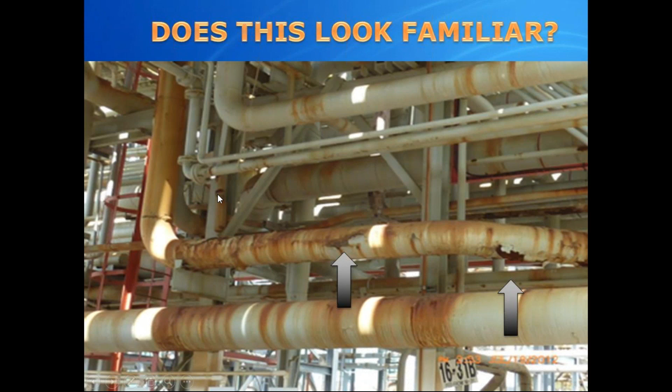I have a few photos to show you. Here's a pipe rack where you can see some major problems taking place. First of all, where the arrows are pointing, you have complete coatings delamination from the 3 o'clock to 9 o'clock positions on the piping itself. You have corrosion at the interface of piping and pipe supports - if you can see my arrow, right around this area here on the pipe supports - and corrosion at edges of angles, like here, and rust stain from overhead corrosion, which is predominantly what you're seeing there, a lot of rust stain.

Here's another example of a pipe rack type situation. This is taken at a bromine plant where salts are a major problem, and you can actually see stalactites of salts coming down. We don't see that a lot in the United States, in most places, but it does happen.

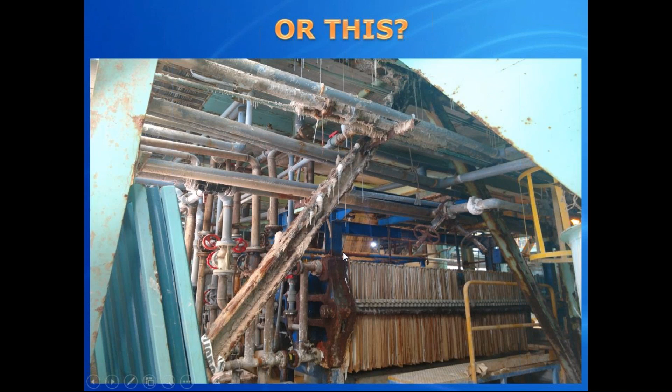Applying coatings over surface salts has drastic effects. Moisture passing through the coating to the substrate, where salts remain, creates a perfect environment for salt-induced corrosion, followed by osmotic blistering, as you're seeing here, and then coating failure.

If you're not coating out right away, you start to see the bottom areas of the pit turning to a dark brown or blackish color. That's actually soluble salts. And if you paint over that, even with a stripe coat or brush-in coat, it's going to fail within about 2 years because you didn't remove the salts at all.

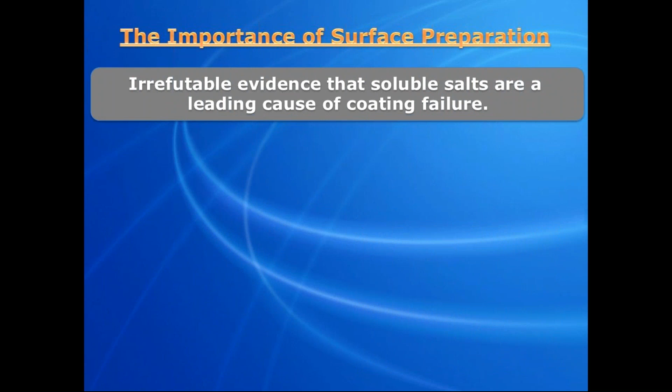There's irrefutable evidence that surface salts, soluble salts, are the leading cause of coating failure, best stated by two renowned authors, Uhlig and Revie, in their excellent reference book, Corrosion and Corrosion Control, as you see in the quote on the slide.

Further to this, Howard Mitschke, then with Shell Global Solutions, conducted an extensive study on the impact of salts on coating performance. He won an award from SSPC in 2002 for his paper entitled Effects of Chloride Contamination on the Performance of Tank and Vessel Linings.

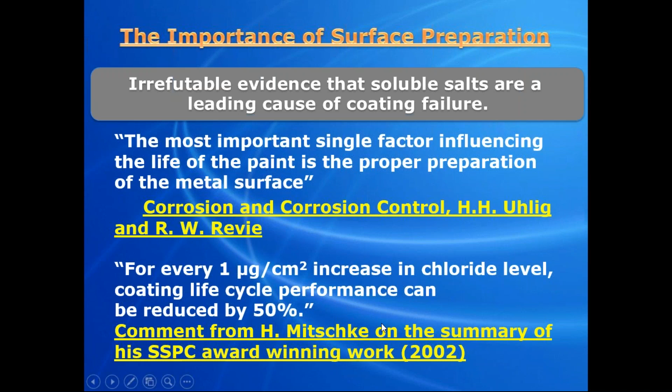He summarized the results of his findings as noted: for every 1 microgram per centimeter squared increase in chloride levels, the coating life cycle performance can be reduced by 50%.

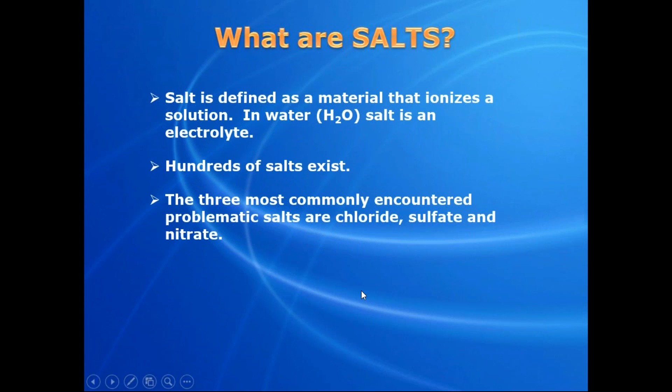Salts are defined as a material that ionizes in solution, and water with salt, H2O salt, is an electrolyte. There are hundreds of salts in existence, but the three most commonly encountered problematic salts, which I'll talk about all day today, are chloride, sulfate, and nitrate. There are others, but they're not nearly as abundant.

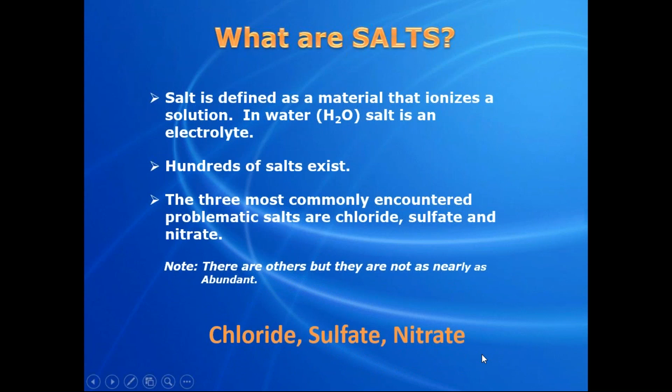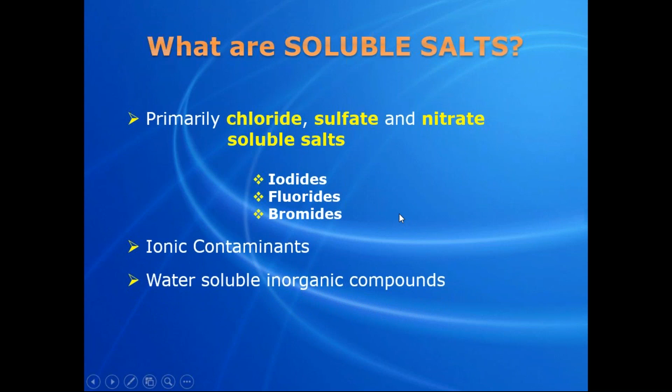Here's an example of some of the other ionic salts we deal with today: iodides, fluorides, and bromides. But all of these salts are ionic contaminants that are water-soluble inorganic compounds, and they are non-visible contaminants.

Why weren't salts a problem when we used lead-based paint?

We all know how harmful red lead paint is when exposed to mankind, and how critical the steps are to encapsulate or remove these red lead coatings today. Myself, after applying thousands of gallons of red lead, mostly in confined spaces, over a time frame of nearly 12 years...

And before OSHA stepped in to protect mankind from these extremely harmful coatings, as OSHA back then was still in its infancy, I had contracted an extreme case of lead poisoning that ultimately damaged my central nervous system. I still suffer from this today.

Nonetheless, red leads were some of the best coatings ever made, but we didn't know until it was too late how it would affect the applicators of this very product.

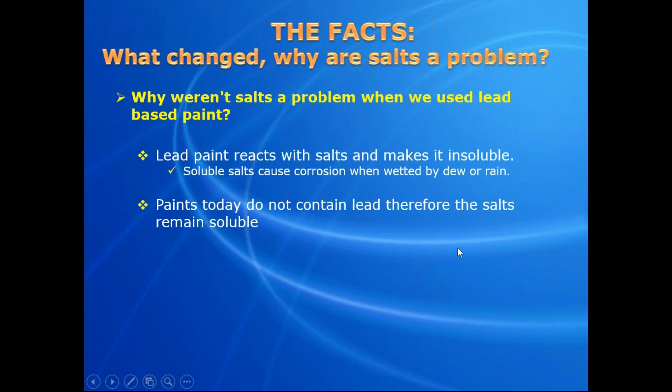Lead paints reacted with soluble salts to make them insoluble, as you see on the screen. Soluble salts without the lead cause corrosion when wetted by dew or rain. Paints today do not contain lead, therefore the salts remain soluble. The transition from lead-based to polymeric-based and thin film coatings makes soluble salts that much more critical.

Here's some of the soluble salt sources: marine bodies, acid rain, fossil fuel, de-icing salts, vehicular emissions, and also human sweat. A lot of people don't talk about that, but I'll make note of it now.

For those that don't know, the human body contains many salts, of which sodium chloride, common table salt, is the major one. It makes up around 0.4% of the body's weight, at a concentration pretty well equivalent to that of seawater.

So a 220-pound person would contain around 400 grams, which is 14 ounces of sodium chloride, around about 80 teaspoons of salt in your body.

Since we lose salt whenever we sweat, it has to be replaced continuously. Imagine you've seen inside tanks, on a hot deck offshore on drilling rigs, or in refineries and chemical plants. You're blasting, and the painter or blaster is sweating, and sweat falls down into the substrate and goes down in there. What do we do? We instantly take a rag with solvents and start wiping.

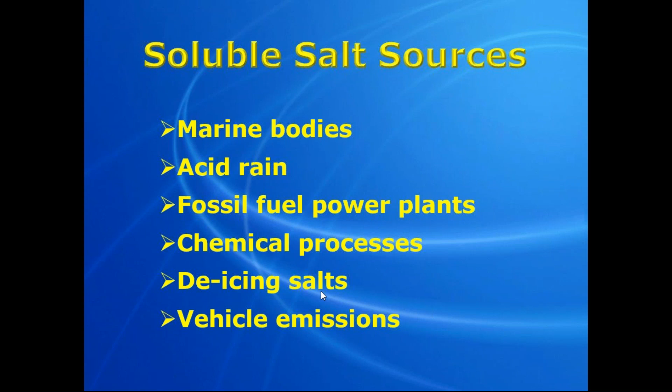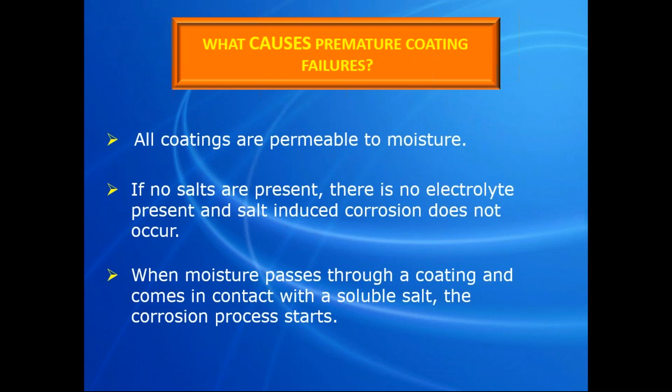All coatings today are permeable to moisture. If no salts are present, there's no electrolyte present, and salt-induced corrosion does not occur. When moisture passes through a coating and comes in contact with a soluble salt, the corrosion process starts.

Here's an example of some of the non-visible things we talk about—these salts are not visible. People who see table salt say, well, I can see that, but not when it gets wet and starts dissolving and goes down into the micropores of the steel. When you do start seeing those effects is when the micropores become inundated with salt contamination and moisture, and it starts turning brown, black, or what have you, and you'll start seeing it that way.

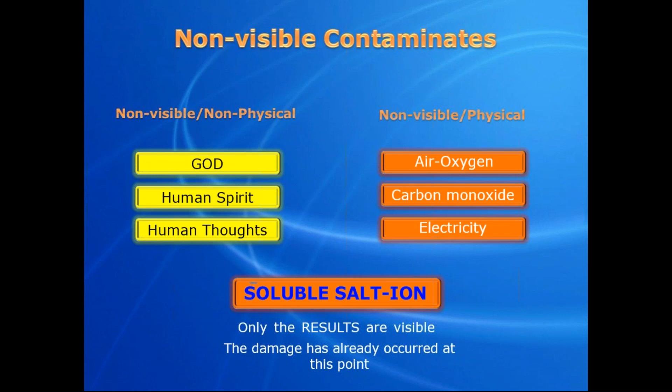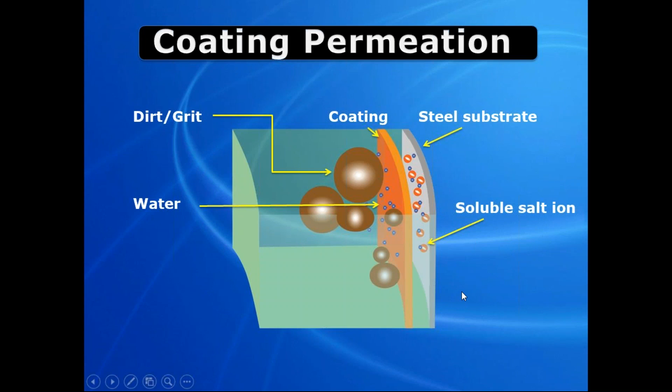Say this orange is the coating and you've got your steel substrate there. If you have moisture penetrating through the coating and there's no salts on the background, it just comes right back out, and there's no corrosion taking place. The dirt and grit, of course, cannot travel through the coating because it's not hygroscopic. But once moisture goes in and finds these soluble salts, the corrosion process takes place, and it will continue because abrasive blasting will not remove it from the substrate.

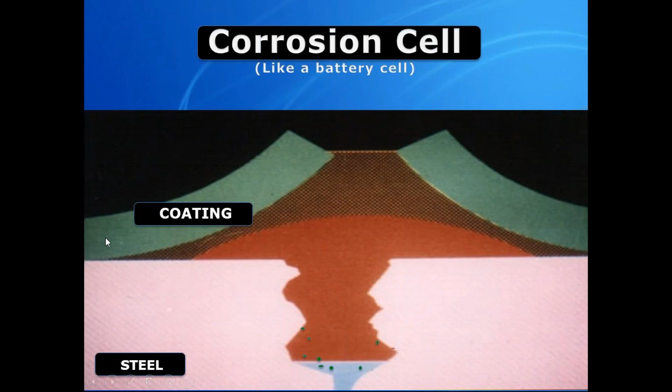The corrosion cell, which we've all seen over the years, is like a cell battery. To explain it a bit more: if you have a coating applied to the steel, and say on the left-hand side there's no salts, no contaminants whatsoever, when moisture passes through the coating it just goes in and right back out because there's no metallic pathway, no salt contamination, no electrolytes or anything.

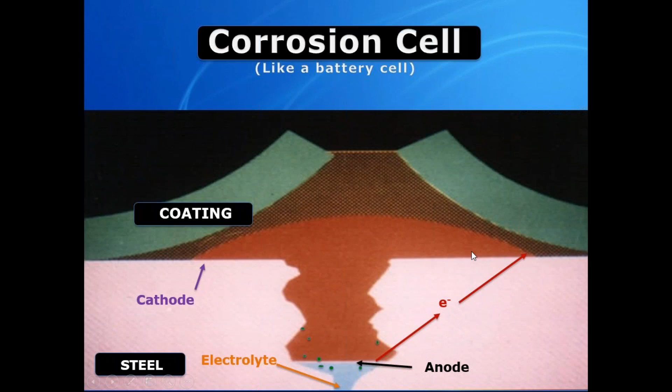And when you do have salt—say these green dots are salts in there—it forms an electrolyte, it becomes a cathode, and here's your anode here, and you have to have the electron or metallic pathway, and it just continues with the corrosion process and keeps building up, and it'll continue all the way through to the steel.

People ask, why can't we remove soluble salts just by abrasive blasting alone? Well, the truth is that the electrochemical attachment of salts to the substrate is greater than the forces used to remove them. So looking at all this, you can see where it's starting to turn blackish up in the lightly pitted areas—and I say lightly pitted because that's what it is compared to what we see in the oil patch, where we see some heavy, pretty dense pits.

But when you start seeing this take place and you want to test for salts—we'll get into that in a little bit—these spots up in here are where you actually want to test to see where you are, as well as for removing them.

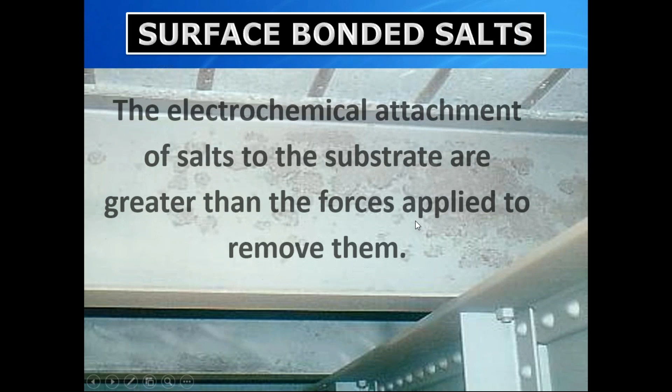Now, I wanted to show you some maps, and I hope you can all see this. Let me hide the control panel so I can see everything. I have a couple of slides here on some maps that give you an example of where we have problems these days with sulfates, chlorides, and nitrates.

This is a map from the National Atmospheric Deposition Program, updated on an annual basis. Here's one with sulfates, measured in kilograms per hectare. For those that don't know, a kilogram is approximately 2.2 pounds, and a hectare is 2.47 acres of surface area, roughly 2.5 acres.

So if you look around Lexington, Kentucky, for example, you have about 24 kilograms per hectare of sulfates there, which is very critical. The same thing up around Cambridge, Ohio, 31 - it's pretty bad, extremely critical.

Now, when you're looking over at California, you don't have very much sulfate issues. However, you've got to make certain you know where the steel came from to build whatever unit you're working on. So if some steel came from areas highly contaminated with sulfates and is shipped over to California and erected there, don't be fooled into thinking you only have to deal with chloride contaminants or what have you. You always want to check the steel, if at all possible, for all three of these major contaminants, to ensure that everything is cleaned up precisely.

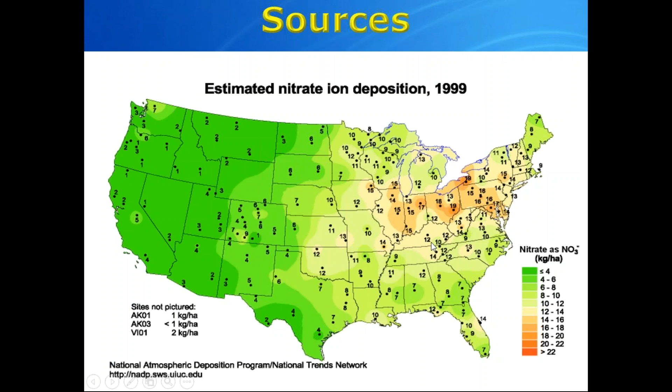Several years back down in Florida, we had a major failure on a coating system that we helped resolve. They had checked for chloride salts only, yet found complete coatings delamination in a lot of areas on this brand new unit within a couple of years, and they didn't know why because they checked for chlorides and didn't find anything. Later, once we came in with the CSN kits to check everything, we found it was highly inundated with sulfates from the previous screen.

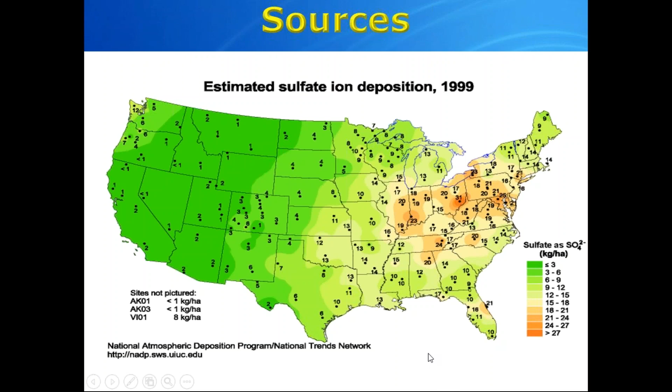Sulfates from the previous screen - we found out the steel came from around the New York area and was built down in Florida. There is a little bit of sulfate issues there from 1999, but that's rare. Down in Florida, we don't see very much of that.

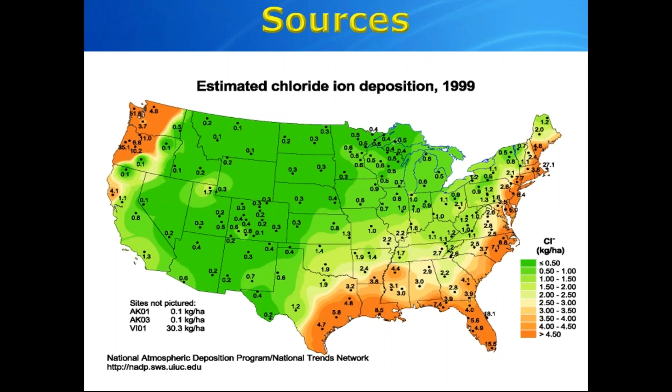And here's our chloride problems. For those of you that don't know, I work down in the Gulf of Mexico area, so I'm working this particular area here quite a bit, and it's heavily inundated with chloride salts. Of course, with the chloride salts from the Gulf of Mexico, it changes every year, as well as with the Pacific and the Atlantic coast. That depends on prevailing winds, with rains coming in from the Gulf or the Atlantic or what have you. If you have hurricanes coming through, it brings in more salt. So these numbers change on an annual basis.

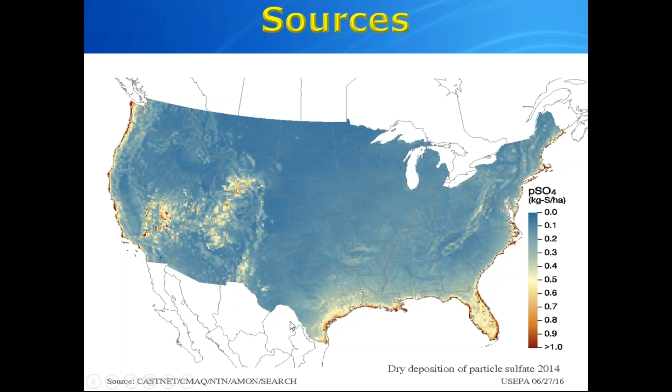This is the United States EPA, Environmental Protection Agency, maps of 2014. It shows a little different aspect - this is sulfates here, and you see a lot more sulfate concentrations over on the West Coast side.

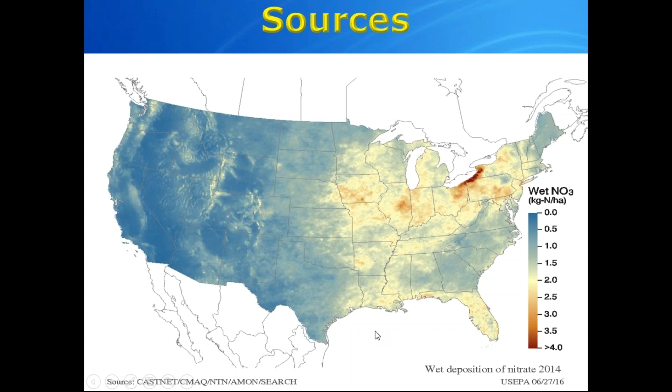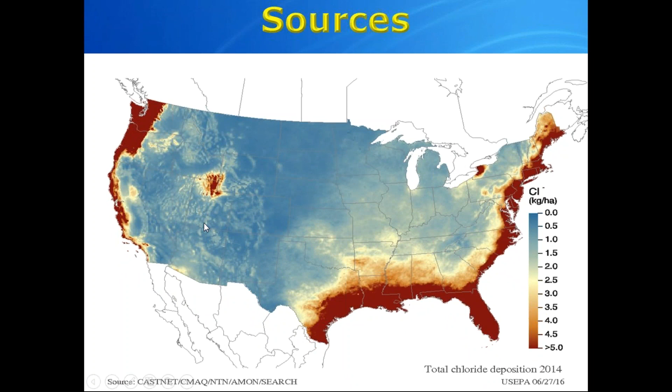Nitrates, same thing - you've got nitrates here from the EPA, and basically from the Midwest all the way east is a lot of the problems with nitrates. Farm country, and you do have some on the West Coast as well. Then again, the chloride salts, which is one of the main culprits, is basically all across the seaboards. And look at Salt Lake City, Utah - it'll give you an example of chloride salts and how detrimental they are.

All right, what we're going to do now is go to where to test when you want to talk about testing, or you want to complete your testing process.

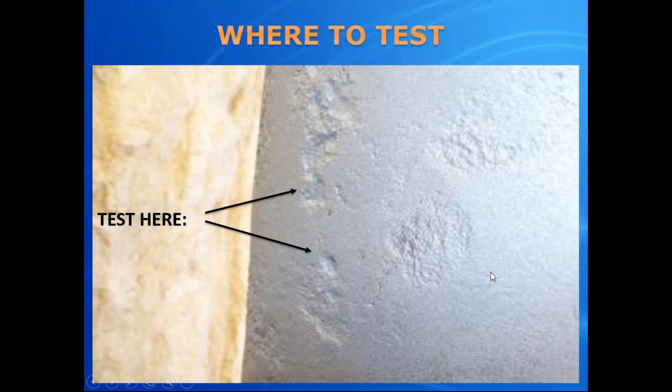This is a coating system that was removed and cleaned up to a near white metal blast, and you can see that there was a lot of pitted corrosion underneath this coating system. If you were to test for chlorides, sulfates, and nitrates, you don't really want to test up in these areas where my mouse is, but where the black arrows are, the heavier pitted areas, is some of the better places to test, because that's the most highly concentrated salt, no matter which type of salt you're looking for. You test in those areas, and then when you're doing a blasting operation, you'll test periodically to ensure you are removing the contaminants, and then you test afterwards in the same spots to make sure you've removed those contaminants according to specification.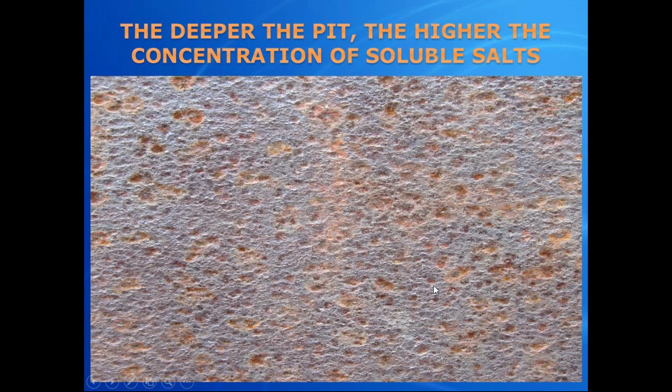This is a prime example of a piece of steel. You see the near white metal steel showing up on basically everything that doesn't have as much pitting in process, but where the pits are deeper, the corrosion is more concentrated and taking place at a very rapid pace. The deeper the pits, the higher the contaminant levels, and it's very obvious right here. Where you test, you want to test where the harshest environment is, and that'll give you an example of what depth of corrosion you're dealing with. And of course, with weld seams, you always want to test around weld seams and within 2 to 3 inches on either side.

Ladies and gentlemen, you've seen over the years where a coating system fails all the time. I always brag about paint - it's not that smart. Why do you blast something, say a tank, for example, and it looks extremely well, but it starts failing at the weld seams alone, when it's the same applicator, same blaster, same atmospheric conditions, same coating, same batch, and everything applied at the same time, and then it fails at the weld seams? If you see failure at weld seams, always go and test at those weld seams. Basically all you need to do there is check for chlorides, and I can promise you that you're going to find salts there.

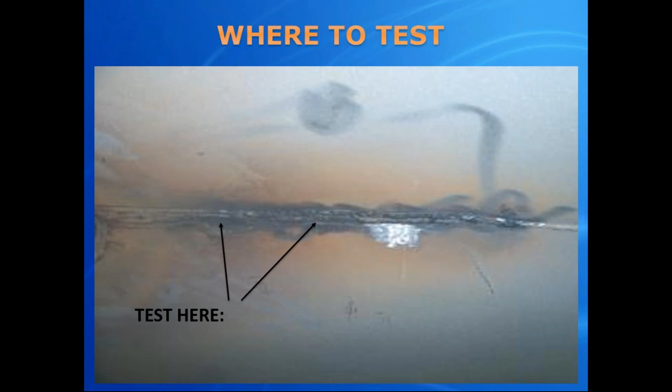You're going to find the chloride salts there, and we did some investigation as to why. The stick rods used for welding carbon steels are basically inundated with magnesium chlorides and sodium chlorides, which are salts. I checked around with the welding societies and found out that they put those sodium and magnesium chlorides into the welding flux to be able to get the arc when they're doing the welding process. So what's happening is when they're welding all these pieces of steel together, they're actually contaminating the surface as we see it today. We knock off all the BBs and pop off all the existing flux that we can see, and we sandblast to get a profile, but we don't remove the sodium and magnesium chlorides that are embedded into the micropores of the steel. Hence, you have induced corrosion, in fact, and don't even know it.

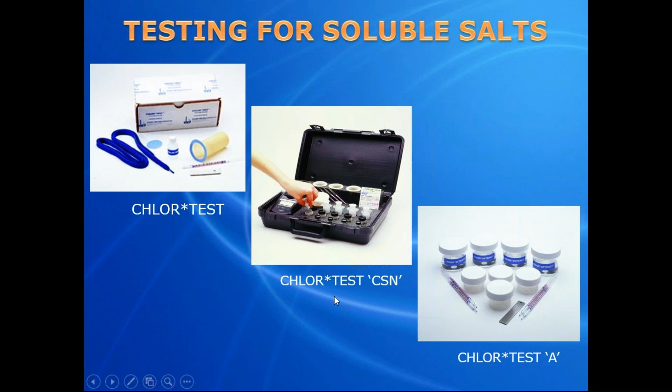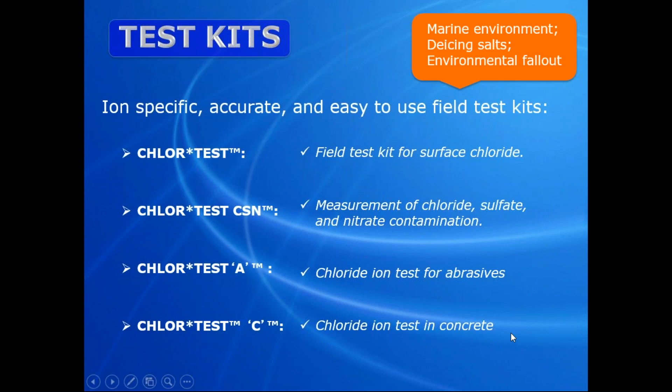This is the chlor test kit, a field test kit for surface chlorides. The chlor test CSN kit measures for all 3 of the main salts we talk about: chlorides, sulfates, and nitrates. We have the chlor test A for testing any types of abrasive, whether it's steel shot, grit, garnet, or silica sand. We also have the chlor test C for testing chloride ion salts in concrete. We have the chlor test W for testing chlorides in water, and the new eChlor test kit, which is an electronic version of the standard chlor test mentioned before.

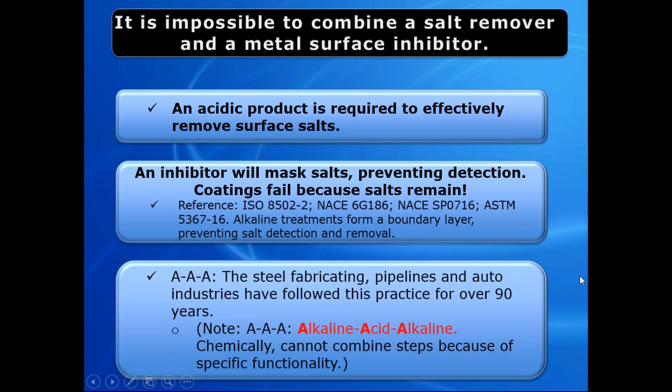ASTM 536716: basically, alkaline treatments form a boundary layer, preventing salt detection and removal. For over 90 years now, there's been the AAA factor regarding pipelines, auto industries, and steel fabricating, where they've used alkaline products followed by an acid wash and then another alkaline product. Think about the automobile industry—they still kind of do that. The reason is when they're cutting the steel, they use cutting oils and machine oils, and those oils get into the substrate or the micropores, so we need to use an alkaline type product to wash these machine oils out. Then we treat with the acid product to remove any salt contamination. Then if you need an alkaline again, you come back with the alkaline product to preserve the steel prior to the application of the primer.

For using our products, think about the marine environment and de-icing salts we talked about before. If you do find excessive salts, there's nothing in writing yet by NACE, SSPC, and ISO, but they're all working on it now to come up with a standard. As we speak, the standards are generally made by the owner of the equipment. But mostly what we're seeing in the industry is that for anything involving immersion, submersion, buried pipeline, tank bottoms, and things of that nature, the industry is requiring about 3 micrograms per centimeter square or less for those types of conditions.

The industry allows 5 to 7 micrograms per centimeter square or less for atmospheric zones. So if you test for chlorides, sulfates, or nitrates and find these limits have not been met, you need to reduce the salt contaminants by following this pattern and using the Chlor*Rid product.

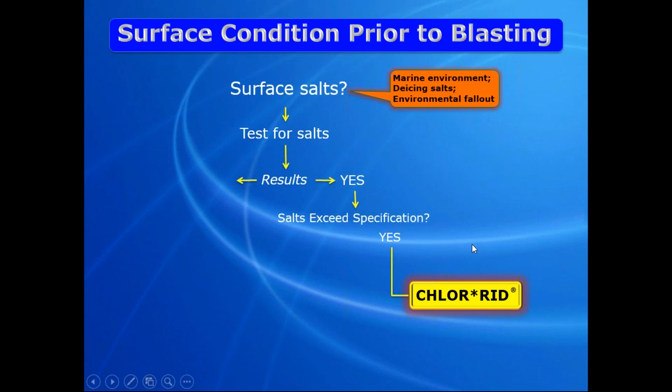We generally dilute it at 1 to 100, which is 1 gallon of Chlor*Rid to 100 gallons of clean, fresh water. Sometimes we'll dilute as much as 1 to 50 in extreme case scenarios, such as offshore drilling rigs, salt mines, and things like that.

It can also be used in vapor abrasive blasting. For surface preparation we use 1 to 50, but we can still do that at 1 to 100 - it depends on the type of work you're doing. You can contact us and we'll work with you to see what works best for your needs.

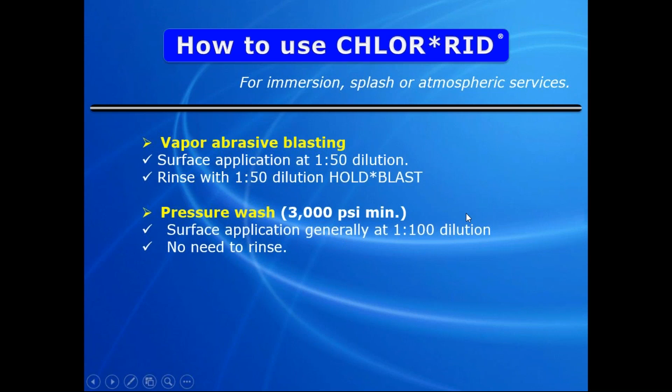You can use 3,000 PSI pressure washing, dilute at 1 to 100, and make sure that you cover every square inch, and you'll be able to get it clean.

There's no need to rinse, and we do not recommend rinsing after use of Chlor*Rid, because most of the water in our industry today has about 35 to 45 parts per million of chlorides in it. So if you come back and freshwater rinse after treatment, you just recontaminated your surface area.

Just use the dilution rates we recommend, and after it dries off, that's it, because the Chlor*Rid treats the salts and pulls them out of the steel. It's electrochemically attached - it pulls it out of the steel and flushes it away with the water that's in there. It just flushes everything away, and now you have clean steel to work with.

We talked about testing before, during, and after Chlor*Rid application. The reason we say during is because we don't want you to test before and after, and then suddenly find out it hasn't met specifications, so you have to go back and redo the whole job. We don't want you to do that.

What we want you to do is test, find out where your problem areas are, then have your applicator apply the Chlor*Rid at, say, a 25 square foot surface area. Let it dry, blow it dry, and then come back and test in those areas where you found high concentration, making sure the applicator is doing the job well enough to remove everything successfully.

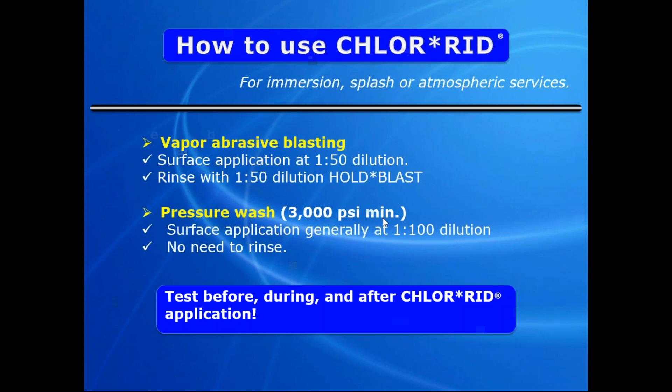Here's a comparison. We had one of our customers several years ago use the CHLOR*RID for treatment, but the reason he didn't use a 3,000 PSI pressure washer is because he only had a 5,000 PSI on the job site. So he went ahead and did it anyhow, and this is the cleanliness you see - it works extremely well.

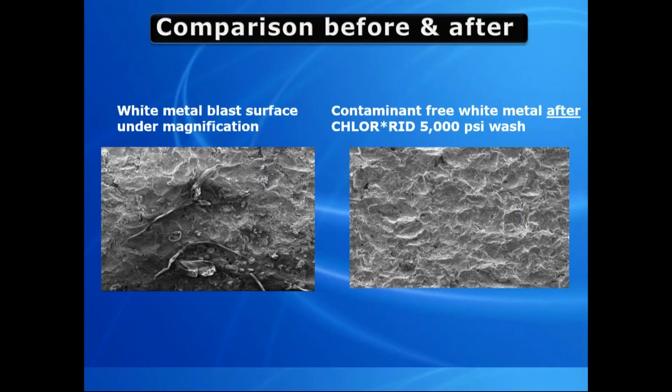The CHLOR*RID is a proven soluble salt remover. It's one-time use only, and it's compatible with all coatings. Why is it compatible with all coatings? Because, like I said earlier, it's all washed away. There's no CHLOR*RID left on the steel in any way, shape, or form - it's clean steel when it's done. You can apply it through any high pressure equipment, even UHP blasting.

It removes light surface oils that I talked about before - light surface oils, not a whole bunch of it. Just something you'd have to test with on your own to make sure you got it all clean.

It dilutes with potable water - we don't need high purity water or demin water. There's no concerns of scum, residue, on evaporation. Some of you with vapor blast equipment have seen in the past where the machine starts clogging up after using inhibitors, and you need to bring it in for repairs to clean out calcium buildup inside those machines. Well, with our products, there's no worry about that. We don't have that type of issue. We will not leave scum on the surface.

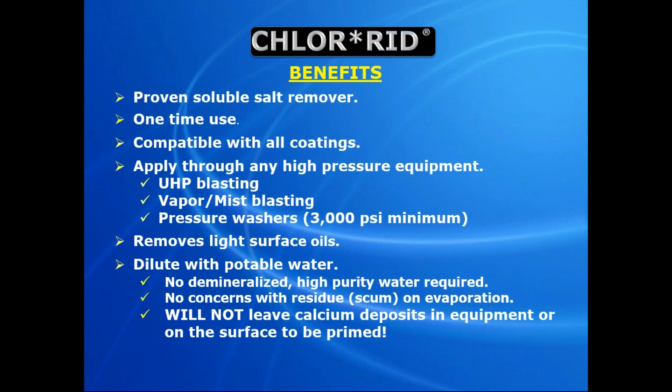And there's no rewashing prior to coating.

We have stocking points close to basically all markets and a wide distribution network. Check with us and we can get you set up with a distributor nearest you.

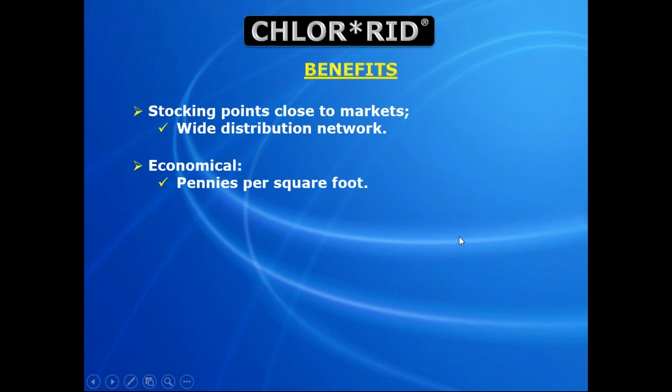It's economical. People want to know about the cost and everything. It's basically pennies per square foot when it's all said and done. It's very easy to handle, user friendly, and environmentally friendly. It's non-combustible, non-flammable, non-hazardous, and it has no volatile organic compounds.

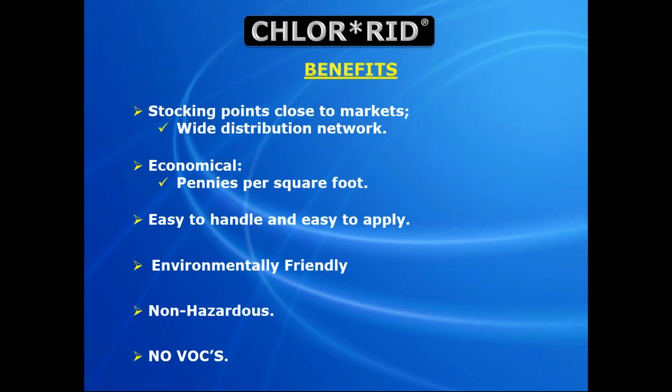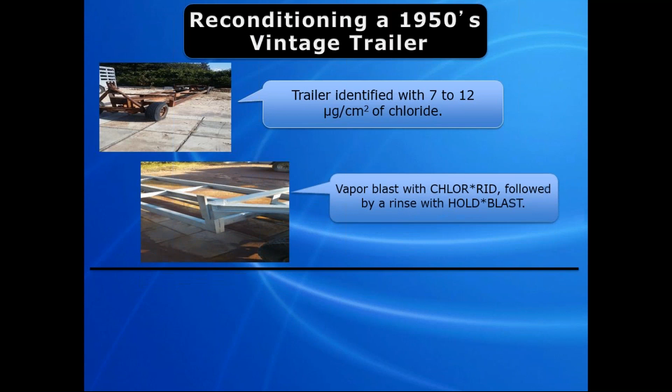This is a 1950s vintage trailer that we did, and it was treated with CHLOR*RID and followed with a HOLD*BLAST rinse. This is 1950s, and look at the bottom of it there, how beautiful it looks today.

Holding the blast, if you see that you don't have any chloride, sulfate, or nitrate contaminants, and you don't need CHLOR*RID, or it's already been treated and taken care of, then you want to save your blast to be able to come back the next day or so to paint out, and you would use the HOLD*BLAST. That's only when the salt specified limits have been met.

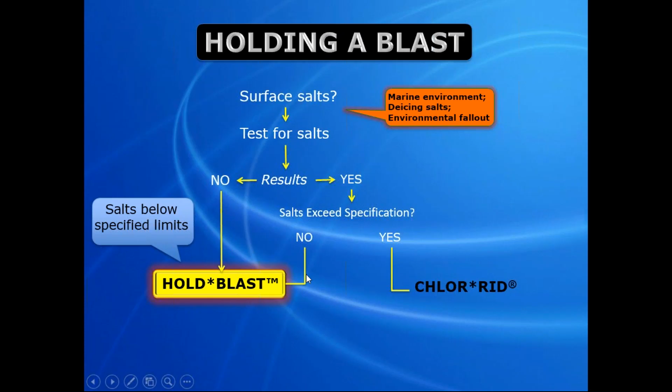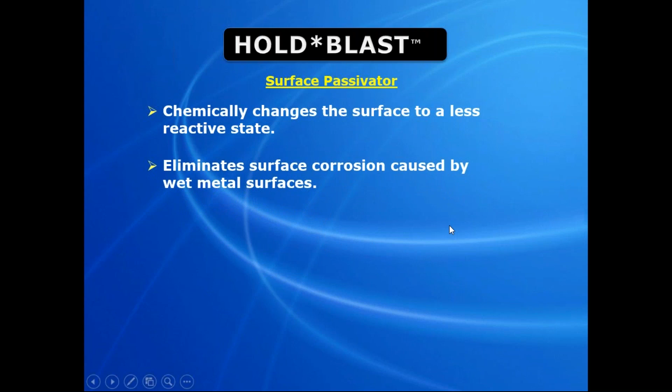HOLD*BLAST is a surface passivator. It's an alkaline type product. It does not remove salts, just minor surface salts. Yes, it'll remove surface salts in a heartbeat, but not these electrochemically attached salts we're talking about. It would just mask over it. It chemically changes the surface to a less reactive state and eliminates surface corrosion caused by wet metal surfaces.

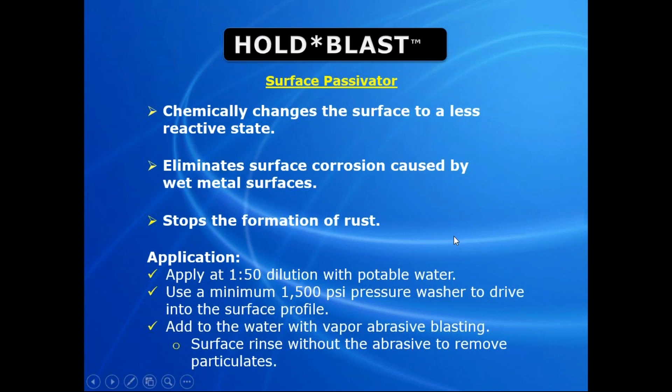It stops the formation of rust, and you apply it at basically a 1 to 50 dilution rate with potable water. All that's required is a 1500 psi pressure washer, just add it to the water with vapor blast equipment or whatever, and you rinse it without the abrasive to remove particulates in the blast matter.

It dilutes with potable water again. Again, no D-min or high purity water is concerned. There's no scum involved with our products. It will not leave calcium deposits in your working equipment.

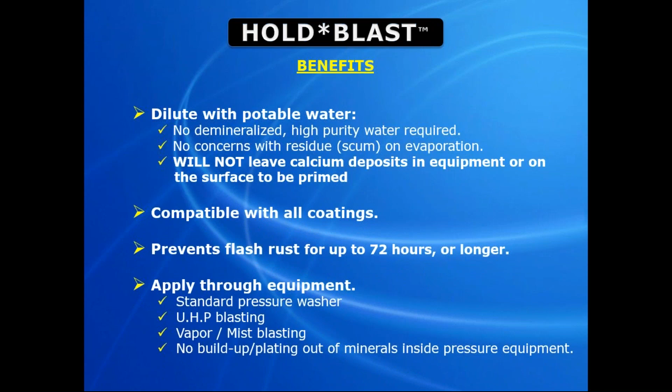It's compatible with all coatings, and it prevents flash rust up to 72 hours or longer. And it applies with regular equipment like I was talking about. Again, pennies on the square foot, and it eliminates the high cost of brush blasting.

You've all done brush blasting before to bring back to life what you've lost overnight with high humidity conditions, and think about how much time and material it costs to re-blast it. Well, if you use the Hold Blast the night before, you don't have to worry about that, unless, of course, there's a hard rain.

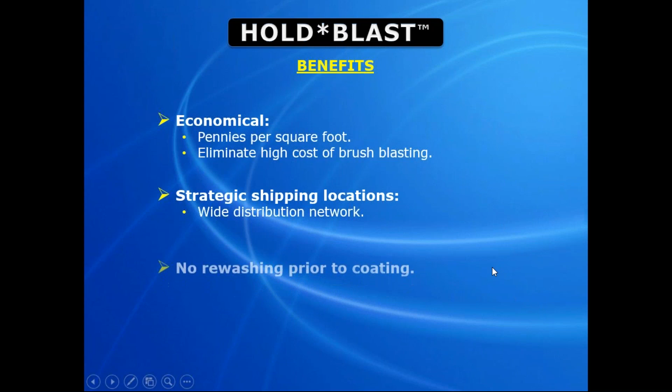No rewashing prior to coatings, and it's easy to handle, and it's extremely environmentally friendly. Here's 72 hours after application with a Hold Blast, and up to 120 hours after Hold Blast.

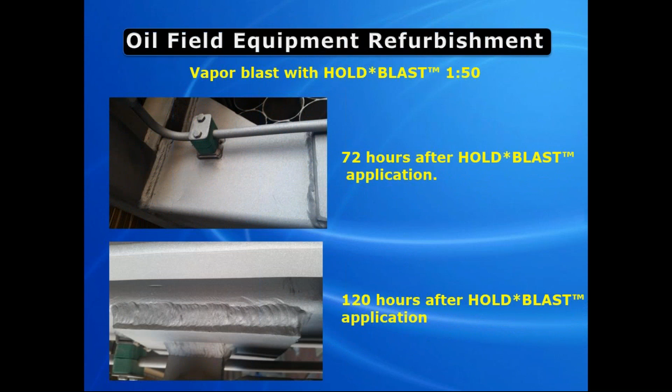Now, I was offshore on a drilling rig. It lasted 9 days before we could start seeing flash rust taking place.

We do offer technical support, and if you need a copy of any of this stuff we're talking about, we'd be more than happy to forward it to you. Just get in touch with us.

The NACE standard 0716 that we talked about, it talks about soluble salt testing, where and when and how much to test. SSPC Guide 15 outlines the various methods used to perform field testing for salts. And NACE 6G186 has general information on soluble salts and discusses removal methods.

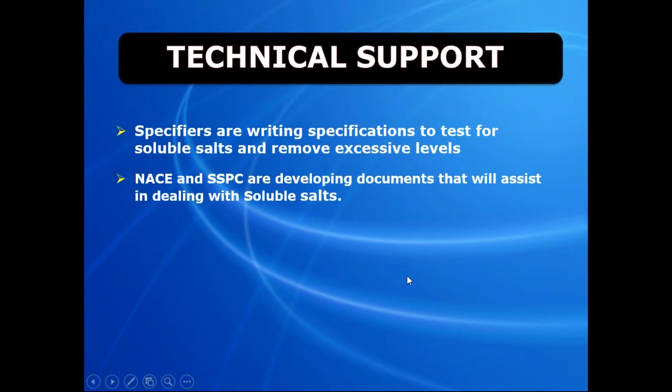We always have specifiers writing for testing soluble salts, and NACE is working with us in dealing with soluble salts, and CHLOR*RID is always there to help you with technical questions. And it's always less costly to test and do it right than to do it again.

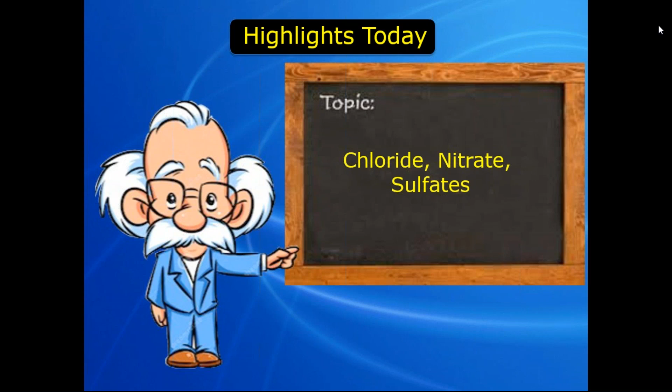Here's another application and tool question, similar to the one asked a couple minutes ago. Is it possible to use an airless pump to wash the surface? I've done it a lot of times in the past, but you need to have at least a minimum bulldog pump, a 30-to-1 pump, that'll give you 3,000 psi at the tip, as long as you have a good tip that's in working order. You need to make certain the pump and fluid hose are cleaned out so there are no solvents involved. If there's solvents in there, you could have other problems, but just make certain the lines are very clean.